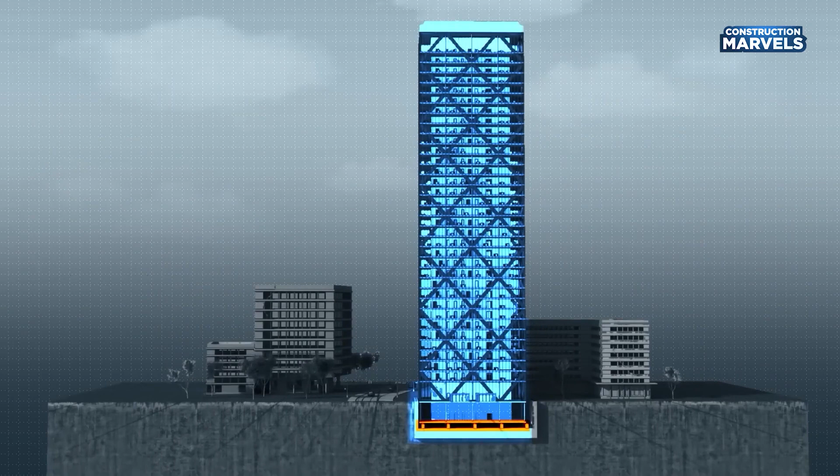Have you ever experienced an earthquake vibrating and shaking everything around you? If so, you would understand what it is like to live without necessities like water and electricity, a life where everything turns awry and haywire. Our understanding of the immovable objects is simply an illusion. They are all grounded in some foundation or platform. Remove the base, and they will crumble right before you.

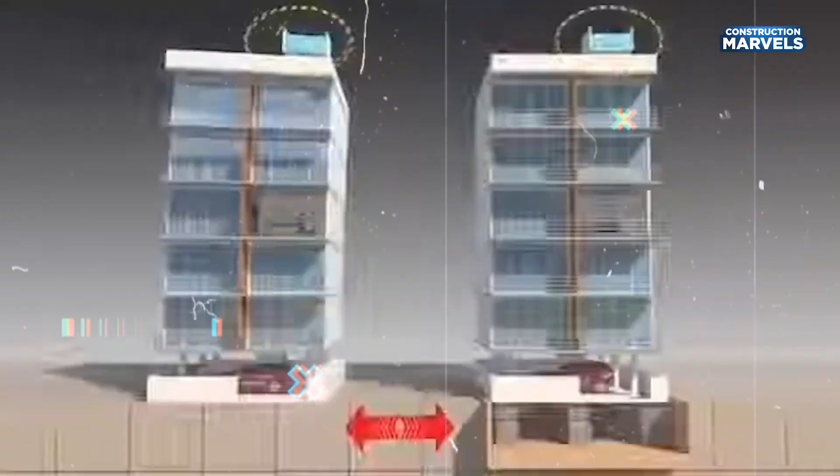Skyscrapers and buildings are no exception. They can't hold up that high without being grounded. Remove the footing and it's ground zero. To solve this, when the earth moves, the buildings must shift accordingly. Stick to the end to find out how skyscrapers survive the worst of natural disasters.

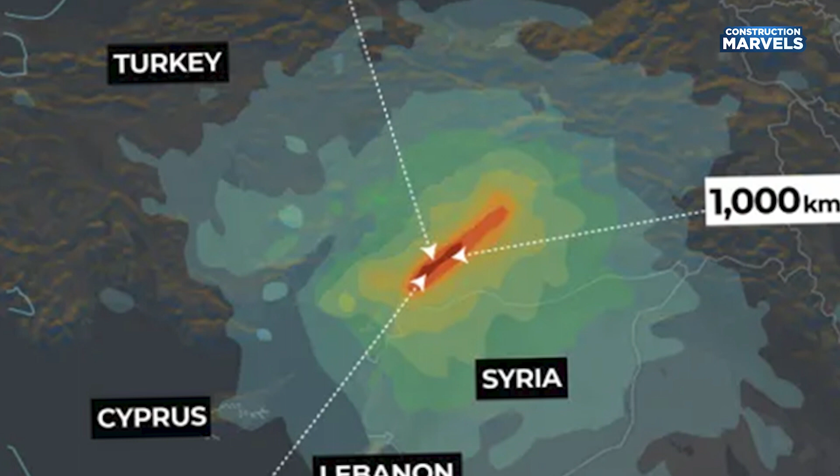Take what happened in Turkey and Syria recently, where a powerful pair of earthquakes rocked the region and caused the collapse of thousands of buildings. These catastrophic magnitude 7.8 and 7.5 earthquakes caused over 20,000 deaths and an estimated $85 billion in destroyed properties in these countries. Turkey and Syria share a regional fault line, the world's most seismically active fault zone, making them more vulnerable than any other country.

How did we get here? On the 17th of August 1999, a disastrous magnitude 7.6 earthquake hit the Kocaeli province of Turkey, causing massive destruction and over 18,000 deaths. 10 years after the Marmara earthquake, the Turkish government established the Disaster and Emergency Management Authority, AFAD, as a one-stop shop for disaster and emergency management and coordination. This single powerful government institution was to lead in planning and preparation to prevent such casualties in the future.

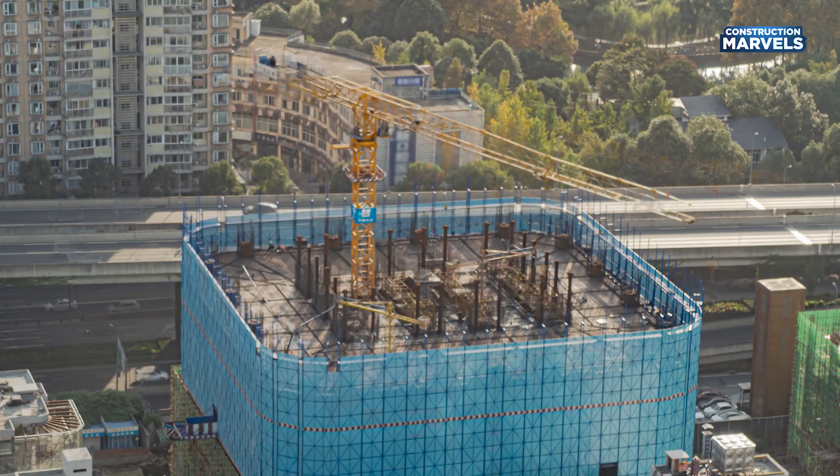AFAD planned, prepared, and strategized to better respond to earthquake emergencies. These plans were outstanding on paper. The reality is, however, tragic. Fast-paced construction and non-compliance with building regulations eroded the gains. NPR reported in 2017 skyscrapers were built in open-air evacuation zones, making the government's preparations useless.

Building to save lives. With these events in sight, how can Turkey, Syria, and other countries build to survive an earthquake? In recent years, natural disasters such as earthquakes have caused significant damage to buildings, infrastructure, and human lives. Building designs that withstand strong tremors have become a top priority for architects and engineers in earthquake-prone regions. These skyscrapers and buildings have proven to save lives and cause less havoc during earthquakes.

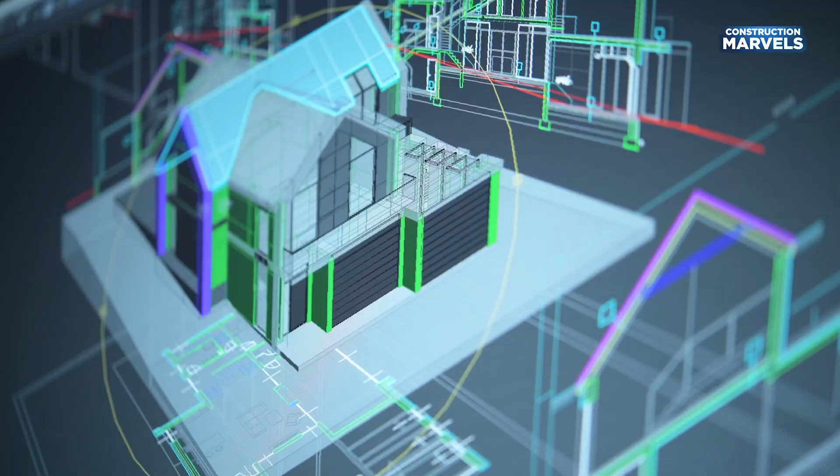Building to withstand earthquakes has been a concern for builders and architects for centuries. Throughout history, civilizations have developed various strategies for building structures that can withstand earthquakes' intense shaking and seismic waves. From the ancient Greeks and Romans to modern-day Japan, earthquake-resistant construction has been a vital part of architectural and engineering practices.

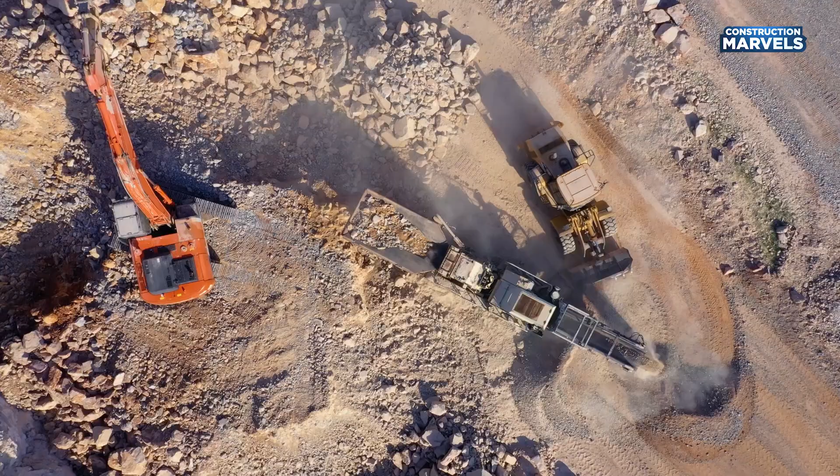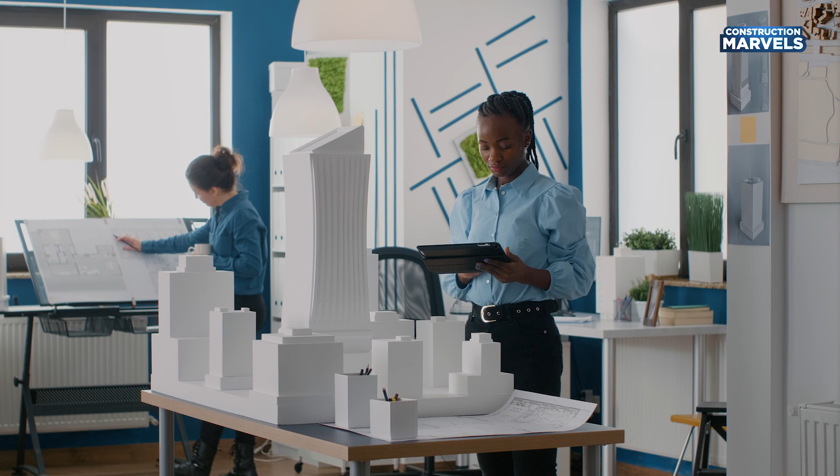As we have already established so far in this video, earthquakes are amongst the most destructive natural disasters, capable of causing widespread damage and loss of life. Therefore, proper planning and construction techniques must be employed in designing buildings that can withstand even the most powerful earthquakes. Ancient Greeks did it. Ancient Greeks were the first to experiment with building structures to withstand earth tremors. Modern engineers and architects have incorporated various technological systems in designing and building shock-proof skyscrapers.

While the cost of building an earthquake-resistant facility may be higher than traditional construction methods, the benefits in terms of safety and protection are immeasurable. Governments should mandate using various earthquake-resistant construction techniques and materials in earthquake-prone areas. Specific architectural techniques, if effectively applied, help buildings withstand earthquakes.

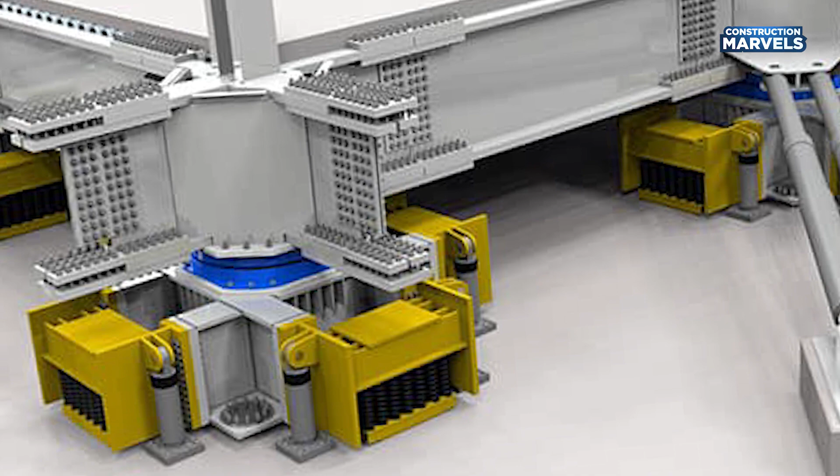One such technique is base isolation, where the building's foundation is separated from the ground by shock-absorbing devices. This allows the building to move independently of the ground during an earthquake, significantly reducing the risk of collapsing. The Mexican way. Torre Mayor in Mexico City is an excellent example of earthquake-resistant architecture. This 55-story skyscraper is in a seismically active area and is designed to withstand earthquakes up to an 8.5 magnitude.

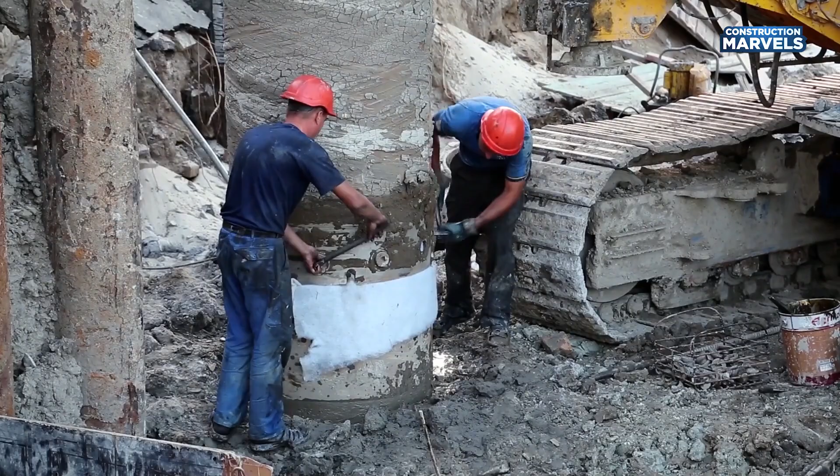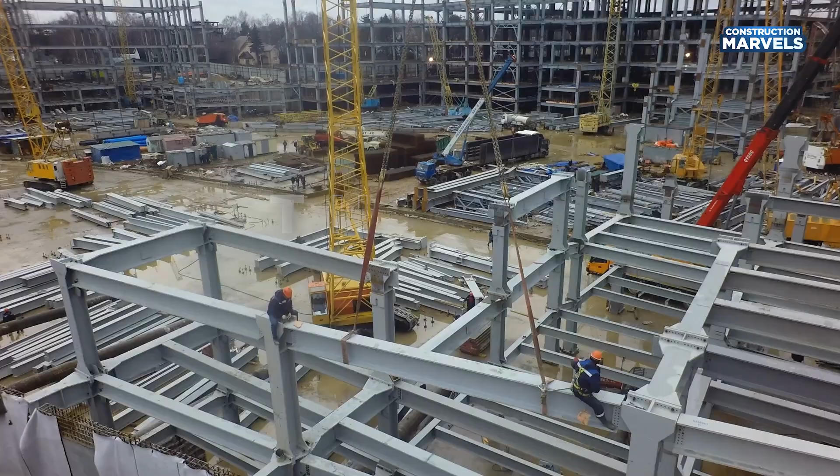The building features a base isolation system and state-of-the-art structural engineering, making it one of the most resilient buildings in the world. Moment-resisting frames is another technique engineers have used to fortify skyscrapers. With this technique, towers are designed to flex and bend during an earthquake and still keep their shapes and occupants safe. Though made of steel and concrete, these frames are built to be incredibly strong and ductile, allowing them to absorb and dissipate seismic energy.

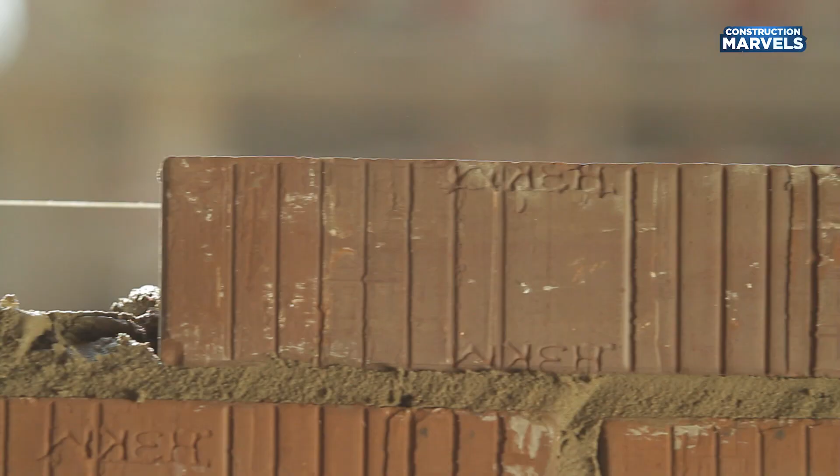Let's remember the importance of proper construction techniques. Builders in earthquake-prone regions must use high-quality materials and follow strict building codes to ensure structural integrity. The Asians can teach the rest of the world how it is done. Lessons from Japan. In Japan, for instance, seismic dampers act as superheroes for most skyscrapers by shielding them from the damaging effects of earthquakes. Friction dampers are among the most effective techniques for reducing vibrations during earth tremors.

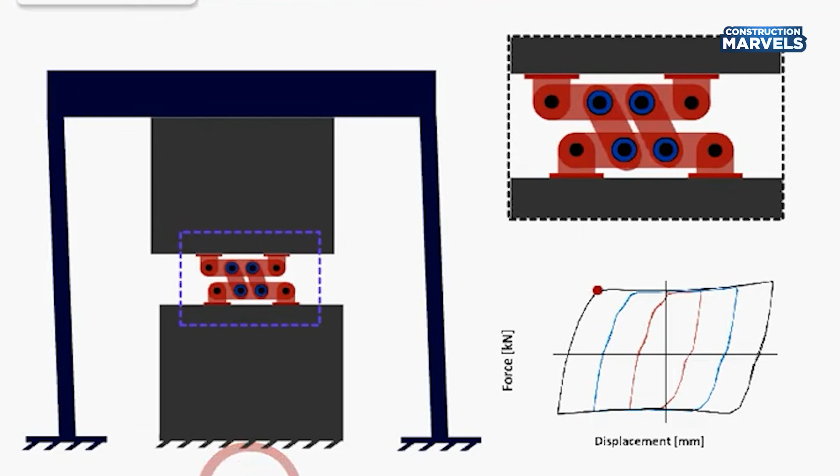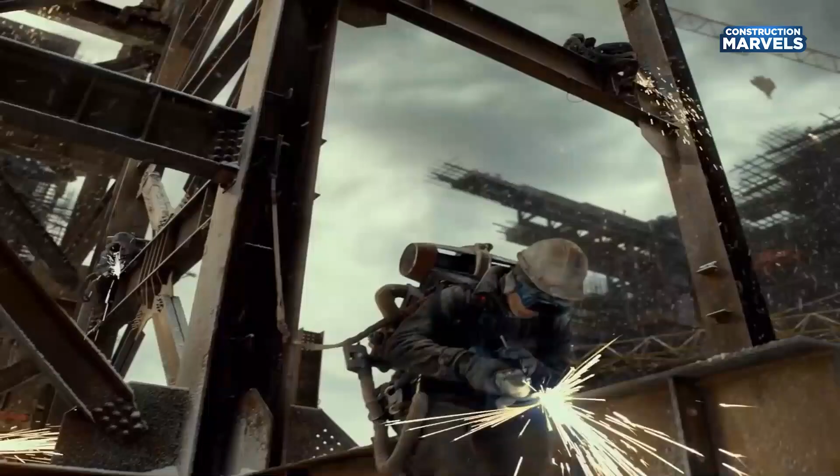Imagine a massive skyscraper swaying back and forth during an earthquake like a tree in a strong wind. This will be a terrifying experience for anyone. Seismic dampers come in handy in avoiding such fear and panic by using friction's ability to release kinetic energy during an earthquake. Simply put, the framework of the building can swing and bounce with the tremors, while the dampers act as hydraulic shock absorbers dispersing the force. Dampers are not meant to prevent swaying entirely, but to control the oscillations.

The safest skyscraper. Though not as famous as Japan or China, Taiwan has one of the most effective earthquake-resistant skyscrapers in the world. Famously called Taipei 101, it is a 1,667 feet tall skyscraper in Taipei, Taiwan. It was the tallest skyscraper in the world when it was commissioned in 2004. Taipei 101 may have lost its title as the tallest building in the world, but it still boasts one of the best earthquake-resistant systems worldwide. It uses its effective internal damper system to deflect swaying and reduce any possible structural failure.

This sleek, greenish building is a sight to behold. Don't be fooled by its beauty. It's built to slide and sway when the earth beneath it starts to shake. This clever feature is not only an impressive feat of engineering, but it also ensures the safety of everyone inside during earthquakes and other natural disasters.

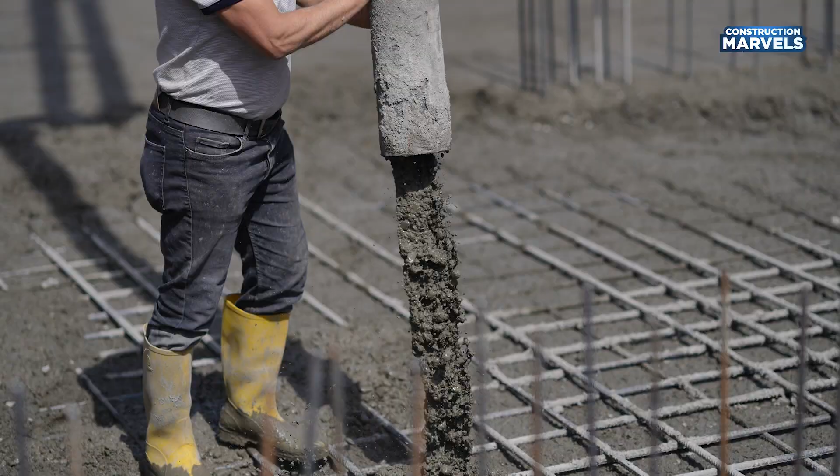However, such buildings are too expensive to put up. Cost is one of the biggest obstacles in creating structures that can withstand earthquakes. Building earthquake-resistant skyscrapers, for instance, requires unique building materials and construction methods, which can drastically raise project costs. A building constructed to survive an earthquake of magnitude 8.0 would cost up to 30% more than regular construction.

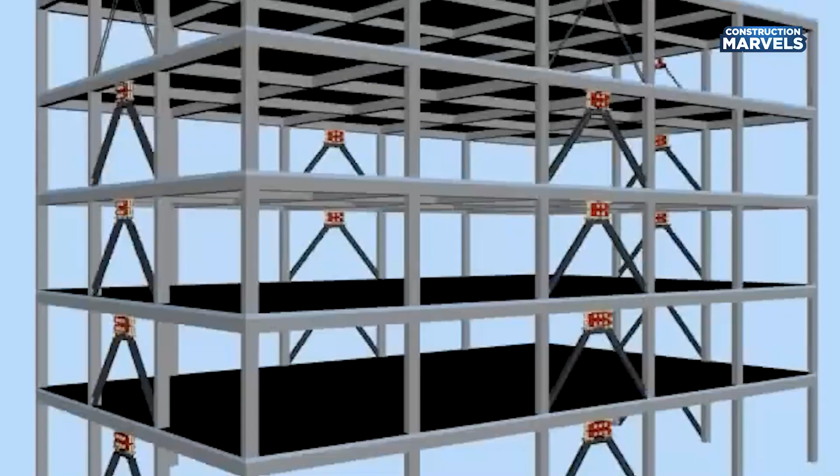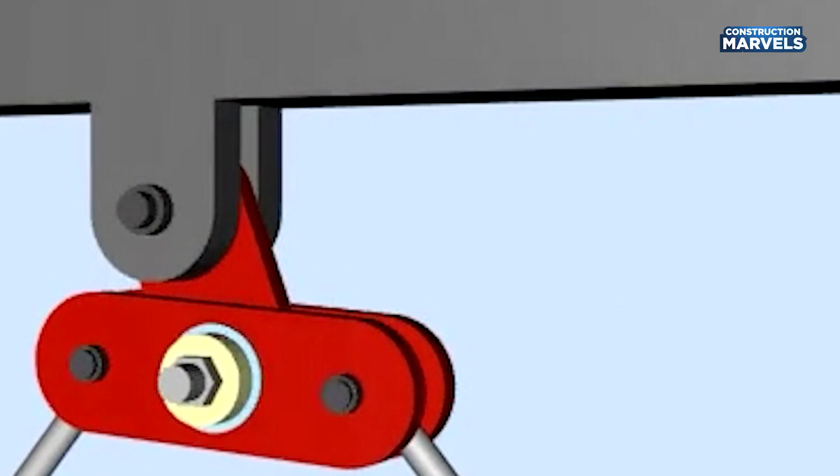However, the truth is, friction dampers are reusable fuses. They are made to activate before the failure of structural parts. Therefore, there is no need to replace dampers after an earthquake because they'll be ready for the next seismic occurrence. Friction dampers can be used to optimize structural components in reducing cost, saving building owners significant money. Therefore, these dampers are efficient, effective, and affordable.

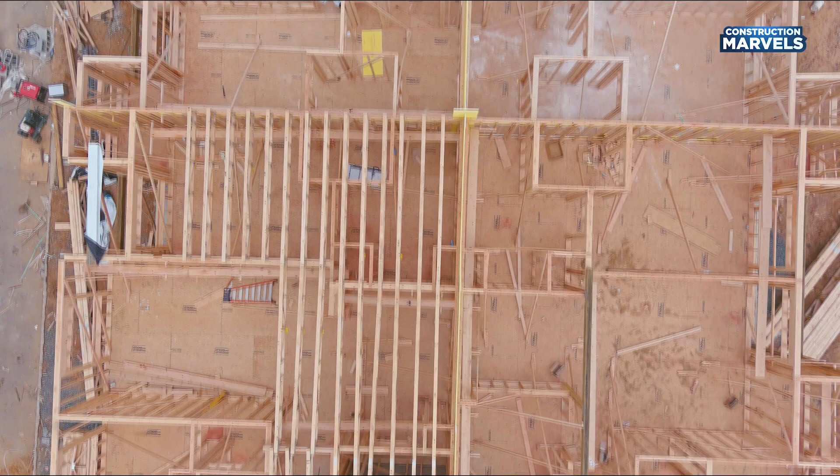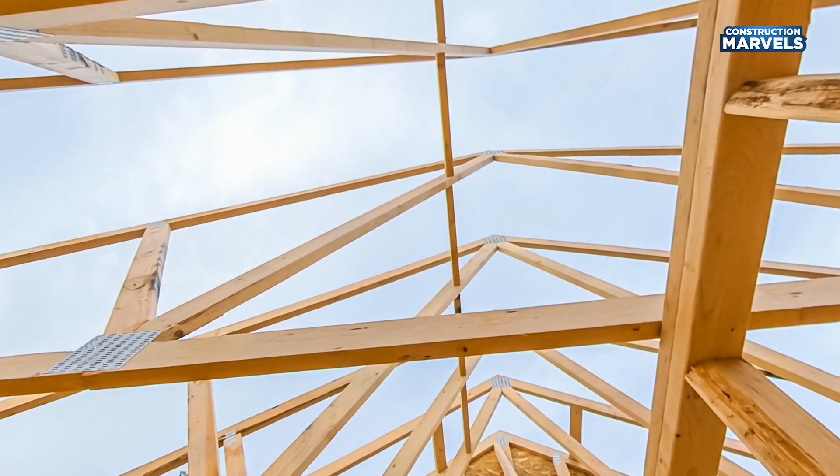Is wood the solution? Wait a minute. What about wood? Mid-rise wood frame buildings can also withstand earthquakes, as demonstrated by the successful test of a 6-story wood frame condominium in Colorado, USA. The test simulated the effects of an earthquake that would occur once every 2,500 years. That's an extreme and rare event. This successful test sparked new hope for safer and taller wood frame buildings in earthquake zones.

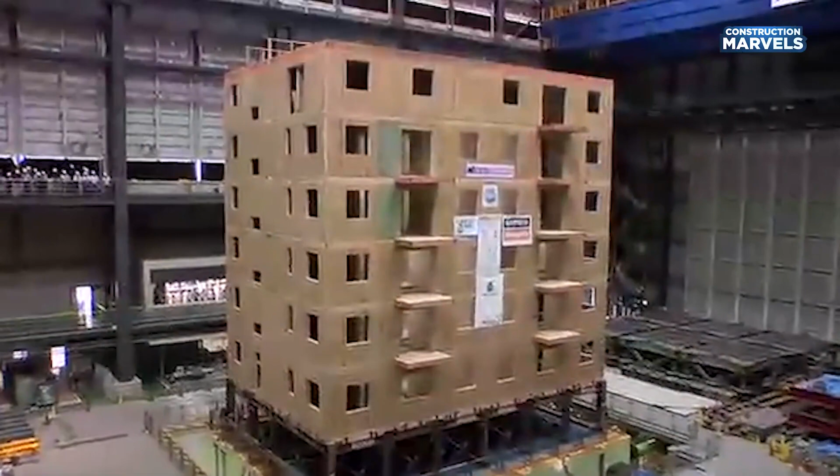Can wood be the game changer? Some engineers advocate for changes in building codes that limit construction to 4 stories. They argue that the structural design of wood frame buildings is based on a series of engineered systems that are relatively easy and inexpensive to incorporate. The Colorado Experiment. According to John van de Lindt, the Colorado state engineer who leads the project, the methods applied in the building can be replicated in all structures built in high seismic regions. This could save lives by ensuring that buildings can perform well in earthquakes.

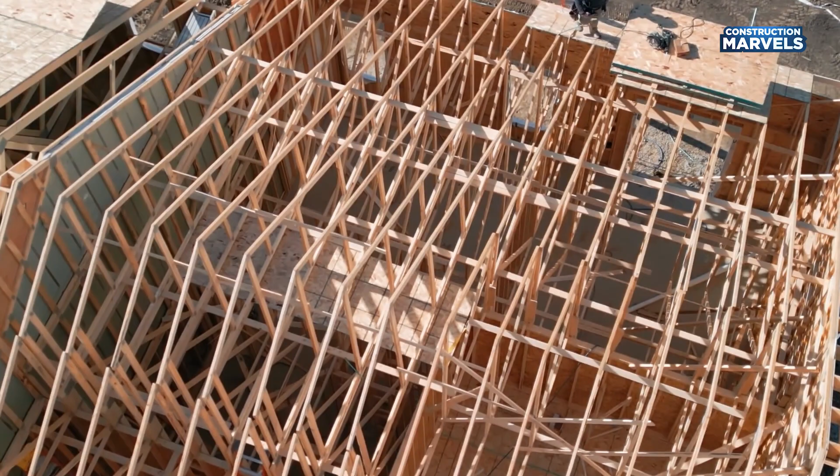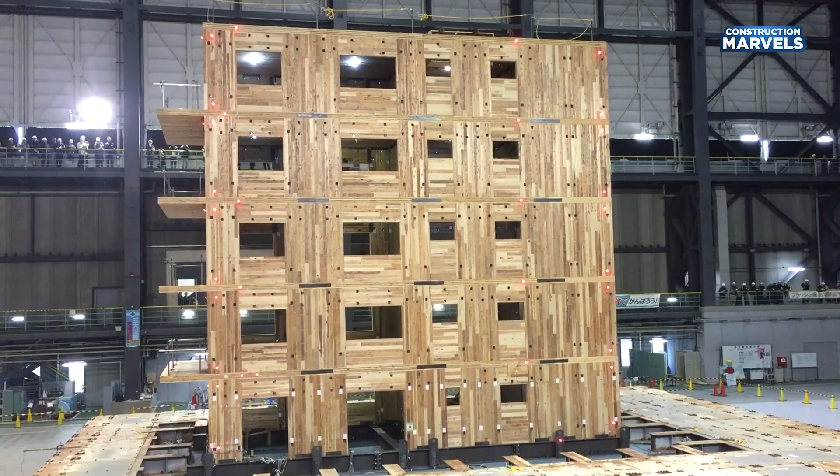Only some agree that wood is a better alternative. They say wood is not as strong as concrete or steel and will not provide adequate protection during earthquakes. They forget that wood is a renewable resource and a more sustainable building material than concrete or steel. Whatever your opinion is, the 6-story wood frame condominium test is a promise that wood can be used in developing earthquake-resistant buildings. The concept is gaining more popularity due to its sustainability and cost-effectiveness. With further research and development, wood frame buildings could become safer and more reliable for construction in earthquake-prone regions.